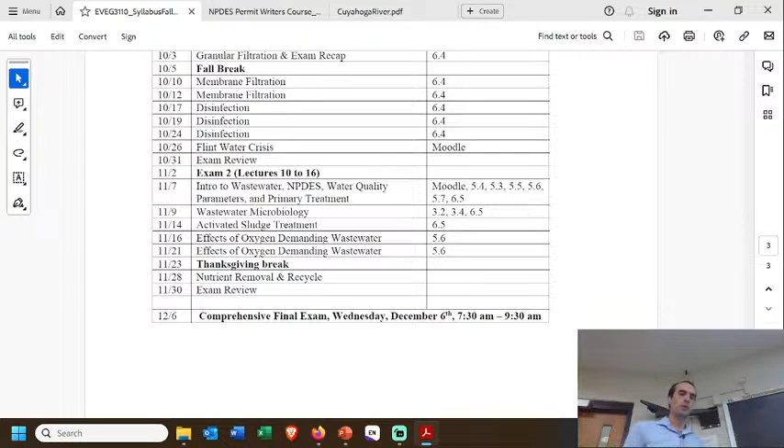And so here, what we're mostly going to focus on is the biological aspects of treatment, making use of microbes in order to do the removal of the waste that we want. We've covered disinfection, which we often do for our wastewater. We've covered sedimentation, which we use in our wastewater, as we'll see in a moment. And so now we're really going to narrow it to primarily these biological aspects. Okay, so that's just a glance at where we're at.

Speaking of disinfection, if you recall, we talked about the fecal-oral route of transmission. We also mentioned typhoid fever and its decline in the States, correlating with chlorination beginning, but it's also a matter of the other side of things, cleaning up our wastewater, right? So as we consider the timeline for rates of typhoid fever deaths, there's modern medicine, there's chlorination, and there's also better wastewater control. It'd be hard to say exactly what fraction is one or the other, but these are all going to the same place.

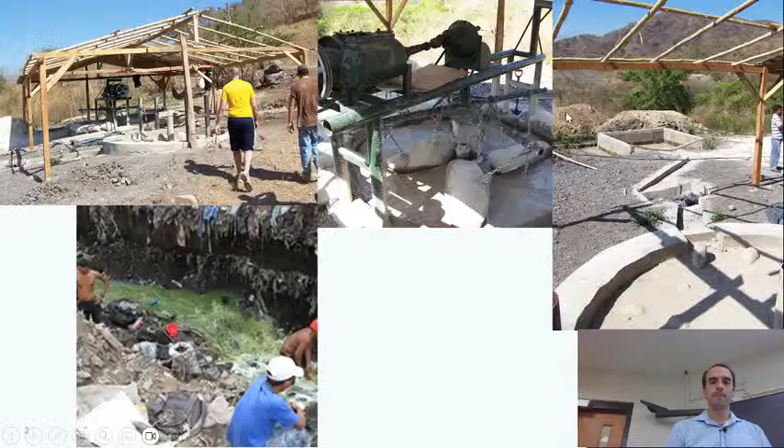So, as we think about wastewater, we might think about local pollution, and here's a few problematic wastewater discharges I've seen, from trips I took to Nicaragua. On the top, an open, unregulated gold mining operation, so they're milling ore in these containers with mercury. They're going to try to keep as much as they can, but a lot of mercury is lost straight to the discharge, emptied into the local creek or wherever it lands, from this makeshift stirring, grinding thing they've got.

And the discharge here has a little retention pond kind of thing, probably to help catch anything they wanted to keep, but it's not so good. Down here we see a discharge that looks super green, gross. It's actually probably mostly algae, but this is running straight through a landfill, and people are digging around for recyclables there.

It's a pretty unfortunate scenario when that just goes straight into a river. The deal is that it's green because there was a wastewater treatment of sorts upstream, using some kind of lagoon type of treatment. We'll talk a bit about those, and then it's just discharging straight through here. So probably not adequate treatment, and the fact that it's running through an active landfill is even worse, because then it's going to catch a whole bunch of other contaminants and send them out to the river.

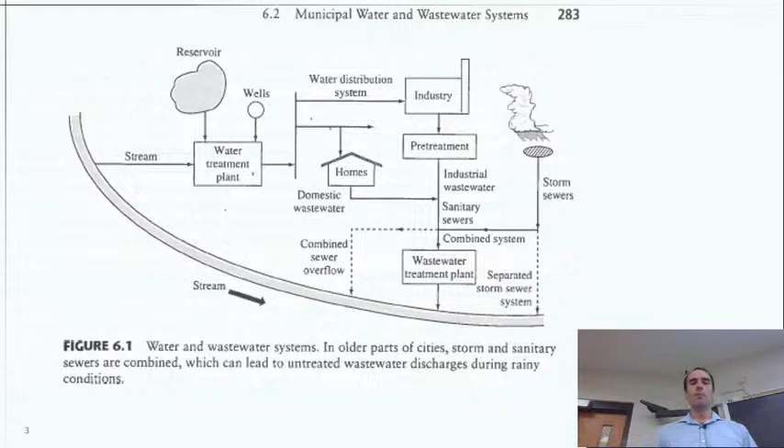So we've seen this image before. We've talked about our water treatment side, how do we make it drinkable? Now we want to consider, given worst case scenarios like that we might find, what do we do to prevent the worst case? What is the worst case? So what is the role of our wastewater treatment before discharging to the environment? Most of environmental engineering comes down to either protecting ourselves from the environment or protecting the environment from our activities, usually a combination of both. We want clean drinking water, and we don't want to kill all the fish in the river. We want both of those things, and fortunately they're not mutually exclusive.

Here we have a typical wastewater treatment design or plan that you might find. We'll have a collection system, that's our sewer system. In Baton Rouge, it's kind of interesting because it's so flat, we have to do a lot of pumping. In a lot of cases we'll design for gravity lines, so if you ever work in anything relating to wastewater, you might find gravity mains and force mains. The force main is where you're forcing the water through, it's pressurized in that sense because you're pumping it.

Theoretically, if we could, we'd always let gravity do the work for us, and so we would have our sewer plant at the lowest geographical area generally to allow gravity to collect things. Or maybe you'd have a pumping station, a force main, to bring it up to a certain spot and then allow gravity to take it from there. Here we generally have mostly just force mains because that's what we have to do.

Okay, so you'll collect your wastewater, then send it through some sort of a screen and grit chamber, something to collect the larger particles, larger stuff. Maybe somebody accidentally flushed a pen down the toilet or something, and where is that going to make it? Eventually it'll probably be removed in this spot if it makes it there.

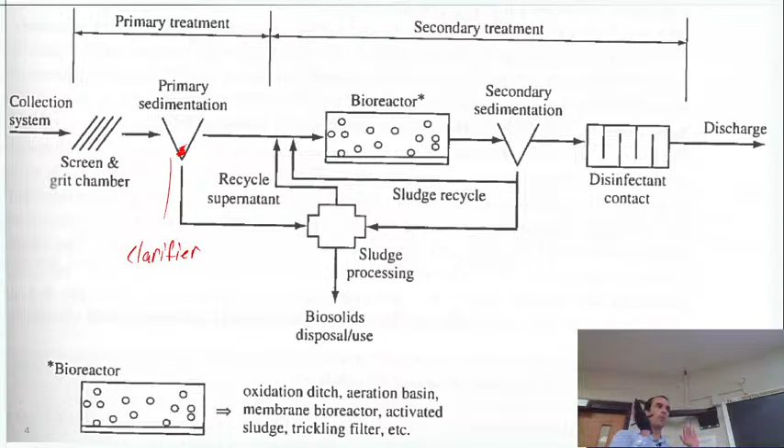So in drinking water, we usually refer to them as sedimentation basins. In wastewater, we often say clarifier. It doesn't have to be that case, but that's just generally how it is. So from here, if we do some basic physical removal and then basic physical gravity separation, we call that primary treatment. So if we are achieving primary treatment of wastewater, that's what we've done.

Basically we've used the most basic things we can. We're not filtering in like a membrane type sense, we're filtering in the sense of, hey, we've got this, just flow it through this rack of bars to prevent any big objects. That's not going to require any extra force really, it's just going to flow right by and catch a few things. It's just going to be a matter of cleaning up that grit chamber, the screen, the bar rack, whatever, and then gravity. Okay, from there, we send it into our bioreactor.

And so now we're talking about secondary treatment. We're using bacteria, sometimes algae, sometimes maybe some fungus or different things, but mostly bacteria growing, and we give them a whole bunch of air. So we're bubbling air through the water typically, if we're doing an aerobic process, and basically giving them the perfect environment to grow and eat stuff.

Because what they're going to do is take all the dissolved things. Maybe there's some sugar in the water, maybe there's some dissolved urea, for example. There's all sorts of organic materials that could be nutritious for an organism.

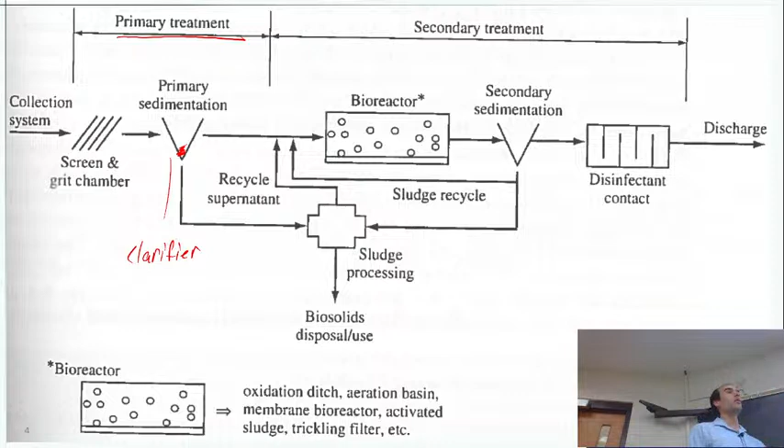And what we want them to do is take these dissolved components and transform them into solid components, because we have a much easier time catching a solid than catching an individual molecule. When we want to treat our wastewater, it's much more handy, much more convenient if we can transform it from that dissolved sugar molecule into a cell that could attach and clump up together and physically just drop out of solution. It all comes back to the simple diagram I showed at the very start: we have some process, we have some stuff, and we want to get it to just a little pile of stuff. We're going to use the bacteria to achieve that, and that way we can physically remove the bacterial cells by the end of this process.

Okay, so we go through a bioreactor. Conventionally or typically, we would call this a waste-activated sludge reactor, or this would be a waste-activated sludge process. We're calling it activated because we're activating it with bubbling air through it, or oxygen. Usually it's just air. It's making a sludge of bacteria. So we refer to it as sludge, or sometimes mixed liquor. We'll call it mixed liquor suspended solids sometimes.

And sometimes, in particular scenarios, we might want to do it without the oxygen and use different types of organisms that do anaerobic processes. It gets a little more advanced with the biochemistry stuff, but you can sequence back and forth if you want to get fancy. But in essence, a secondary treatment typically employs an aerated waste system, an aerated bioreactor at least.

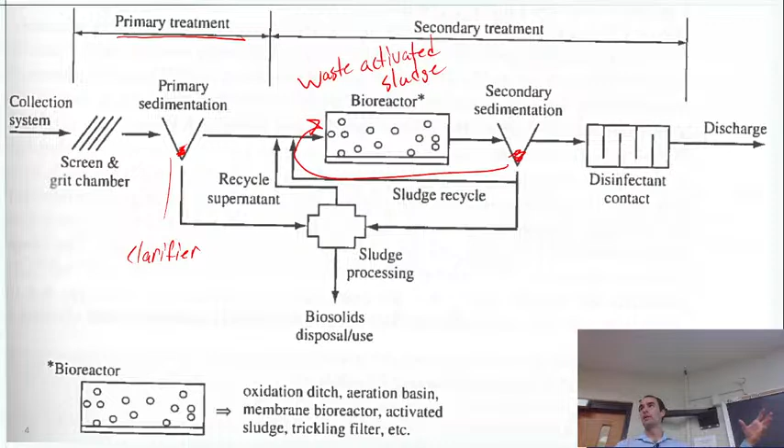From there, we'll find that we typically recycle some of that sludge straight back into our reactor to keep the same type of bacteria that are being very useful for us, to keep them growing and happy. Because if we had none of them return, then we'd have to start from scratch every time. So we like to keep a high concentration of these bacteria in there so that they are constantly consuming a bunch of waste. We'll cover more about that in a lecture or two.

Likewise, we send some of that to sludge processing. So it turns out that difference, how much we recycle or how much we send to waste there, it will end up being very important for us. So like I said, we'll come back to that.

We often have disinfection added there for our discharges, and that would constitute our secondary treatment. Maybe if we were doing some fancy nutrient removal stuff, if we had a phosphorus problem or a nitrogen problem, we might add a tertiary step. And this would typically be introduced actually before the disinfection. So we would kind of put in tertiary and just do disinfection last. Disinfection is kind of going to be last, and we generally just lump it in with secondary treatment.

Okay, so that's a typical wastewater operation. So what we're going to do today is talk about, well, what do we have to achieve with this wastewater treatment? What we're going to talk about next time is going to be, all right, how does this bioreactor thing work? And how do we get a handle on the important mass balances that are going to be involved with knowing how much waste can we remove and how does that relate to the bacteria that are there, because those are the things that we can manage.

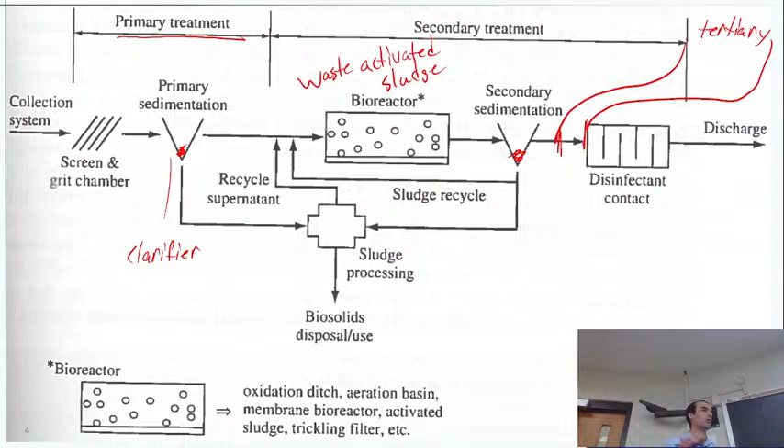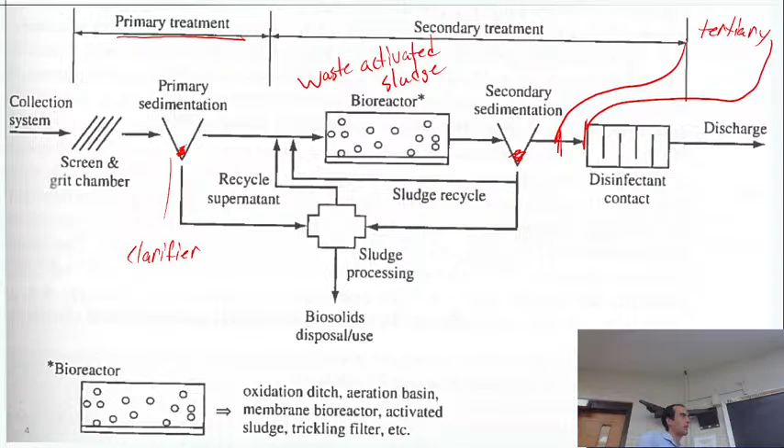Okay, so wastewater regulations. Oh, and by the way, including today, we'll probably cover this first initial step, the screen bar rack stuff. It's just a couple minutes to chat about what that looks like in practice. So we'll start that today, but that's pretty minor.

Okay, so regulations and standards. Well, typically what we're going to do is treat our water in such a way that whatever body of water is going to receive the wastewater is not going to be significantly harmed, right? We want to protect specific aspects of that receiving water. If we're discharging into the Mississippi, well, down here, the Mississippi's got a lot going on in it already, and so our wastewater may not impact it too much. But if you're discharging into a small stream that's very clean and clear, it's got a lot of wildlife in it, that could be a different story, right? And we want to protect that in order to maintain as close as we can kind of the natural state of what's going on there.

So the way we enforce that is a program called the National Pollutant Discharge Elimination System, NPDES.

I worked briefly for Michigan's NPDES program and received training on that, so I have some slides to share a little bit about it with you. That was in 2015. There have been a few updates, as there generally are, but nothing too major so far.

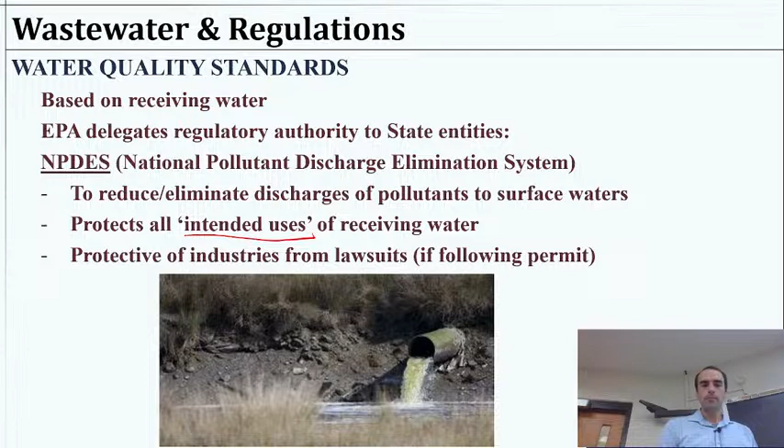Okay, so then we have conventional pollutants. These are the first ones that become pretty obvious. We call them conventional - this is usually what primary and secondary treatment is designed to handle first and foremost. So we have these conventionals and then we have some extras. The conventionals really are maybe the most obvious. If you discharge water that has a lot of what we call biological oxygen demand, then downstream the water becomes deprived of oxygen and the fish die, it stinks, everybody's unhappy, right? It's conventionally obvious, I guess.

So we'll talk about these few. First of all, this biological oxygen demand. This is something we'll spend more time on, but it's a measure of the type of substances that can feed microbes, basically. It's kind of like if you were to put sugar in water, bacteria could eat the sugar. That's an oxygen demanding substance because the bacteria are going to eat it, go through respiration, consume oxygen, and emit CO2. So it's the amount of oxygen demanded by microbes for this respiration when they eat organic matter.

So this is a loose way to quantify the organic matter, but in the units of oxygen consumed. That way we can know something about how much oxygen is being used. That way, if we have a wastewater discharge into a stream, we can know whether or not that stream will become oxygen depleted, because we know our fish and wildlife need oxygen in the water, and if we drop it too far, there are problems. So this is kind of the scheme of BOD, biological oxygen demand.

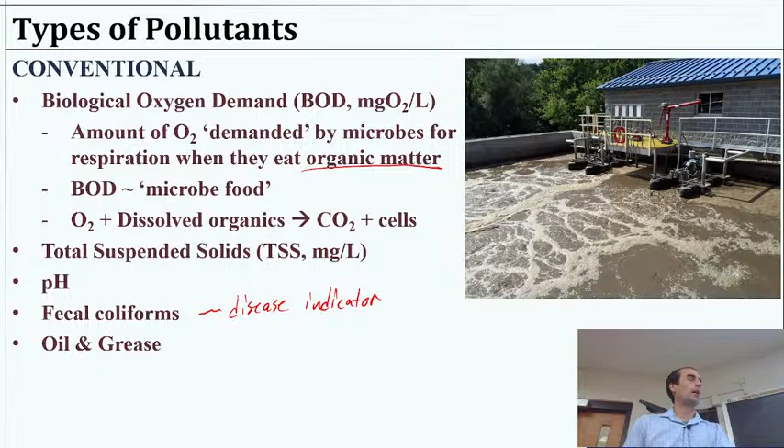Okay, last one is oil and grease, and that might sound a little obvious, but if you discharge a bunch of oil and grease in some industrial process, you're going to get a layer of oil and grease on the surface of the water, and that might not look too nice. It might cause some ecological disruptions, but it could also set your lake on fire if you're not careful. So one of the reasons that's in there is that this is something that has actually happened.

We've actually seen several cases in the 50s and 60s, and maybe into the 70s, where there were just unregulated discharges of oil and grease from different industries. Eventually you get an oil slick, and if you have an ignition source, you get a big old grease fire. Do you guys know how to put out a grease fire?

Okay, so if you've got it in a pan, take it away from the heat and put a lid on it. Good stuff. What else? Not water. Right, not water—why not? Because it'll just make it expand. I don't know the chemistry, but I know it makes it worse. Yeah, it makes it worse.

If it's in a pot and you pour water on it, the grease normally floats, so the water sinks, and then it boils because it's really hot. What happens when you boil water? Steam—it expands. What happens if you do that while it's covered? It kind of explodes, right? So really quickly, the water you just poured on it suddenly explodes, throwing burning grease everywhere. I saw a video recently of a firefighter demonstrating this, all suited up with a pot of boiling, burning grease. He just takes a little can with a stick, dumps in the water, and it goes everywhere—flames, a big fireball.

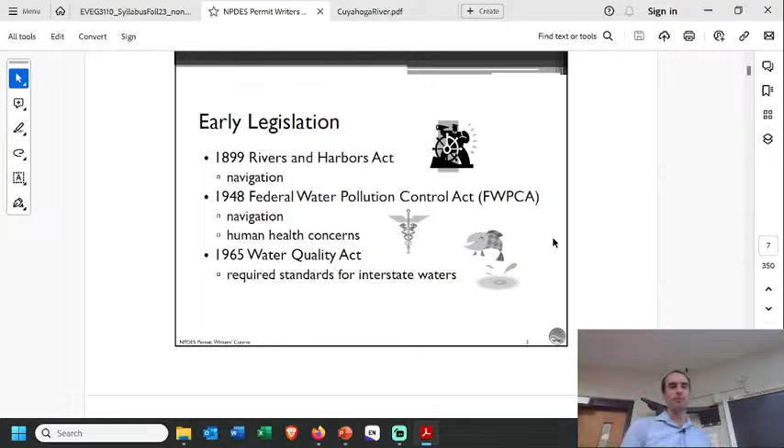So, in 2015, I had a chance to go to a super exciting workshop. I'm saying that with some sarcasm here. It was a nice workshop. It was about a week-long course. You go into kind of an office building, and this was in Chicago. It's neat to go to Chicago. But basically, it's kind of like 8 hours of lecture a day, but the lecture was sort of like, all right, let's look at this number, and in the Cuyahoga River, here's what happened. Just very monotonous, and you kind of had to try not to fall asleep. So it was interesting. Hopefully I can make it a little more interesting. So I posted this in case you wanted to see kind of the bigger scope. It wasn't that bad. I like to joke about it.

So we've already talked a bit about it, so I'm just going to skim through this first chapter of it for a couple minutes, point out a few highlights. We'll take a look at a table of the toxic compounds that we know about. And whatever I forgot to mention, hopefully I can add it in here with you. That's what I plan to do here. So, okay, early on, the first semblance of some sort of wastewater discharge control actually came from navigation.

So keeping navigable waters navigable was kind of the first effort towards keeping some control of wastewater. That was the Rivers and Harbors Act. So I don't know, you can't send too many dead trees down the river or something. It had to do with that.

Later that became 1948, the Federal Water Pollution Control Act. That's when we started saying, okay, we have some human health concerns here. This is probably not good for us. Let's start acting on that. 1965 was the Water Quality Act. Okay, maybe we've had one too many lakes on fire. And so that started requiring standards for interstate waters. And a lot of the federal guidance is kind of from an interstate waters type of a situation.

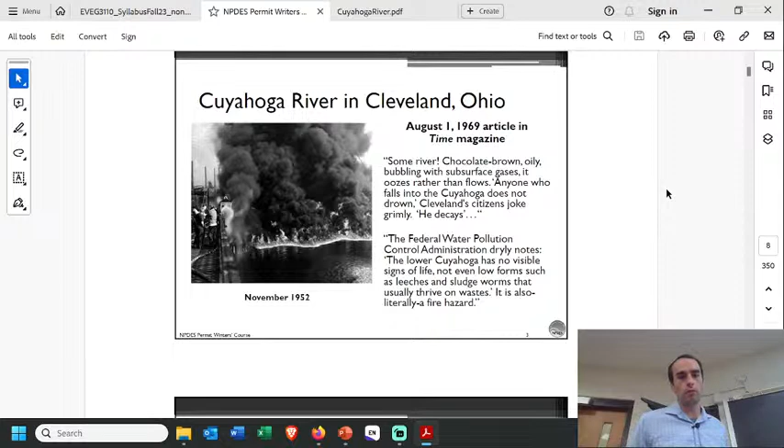Okay, so from that article, this is the Cuyahoga River in Cleveland, Ohio, August 1st, 1969. I'm just going to read this clip. Some river, chocolate brown, oily, bubbling with subsurface gases, it oozes rather than flows. Anyone that falls into the Cuyahoga River does not drown, Cleveland citizens joke grimly. He decays. The Federal Water Pollution Control Administration dryly notes, the lower Cuyahoga has no visible signs of life, not even low forms such as leeches and sludge worms that usually thrive on wastes. It is also literally a fire hazard.

So that was the state of things. That photo is from 1952. This article was 1969. So that fire was early in the 50s, and it was still known as a fire hazard by 1969. So 1970s, when we really started getting some progress towards our current regulations. This was kind of the first draft Refuse Act permit program. It was struck down because it wasn't constitutional. It was perhaps a good direction, but poor implementation sort of situation.

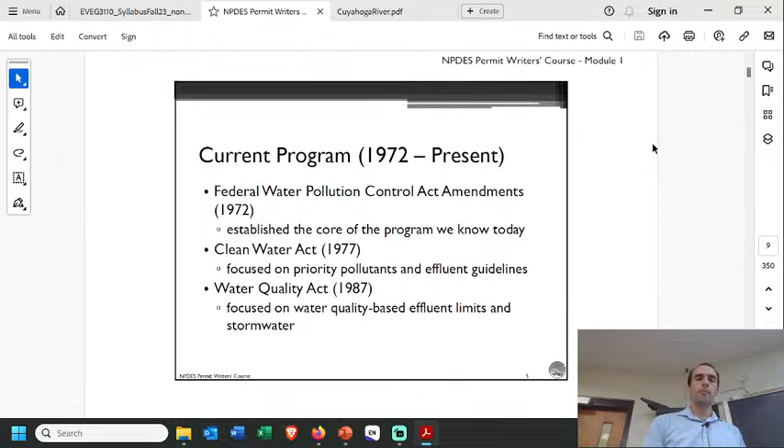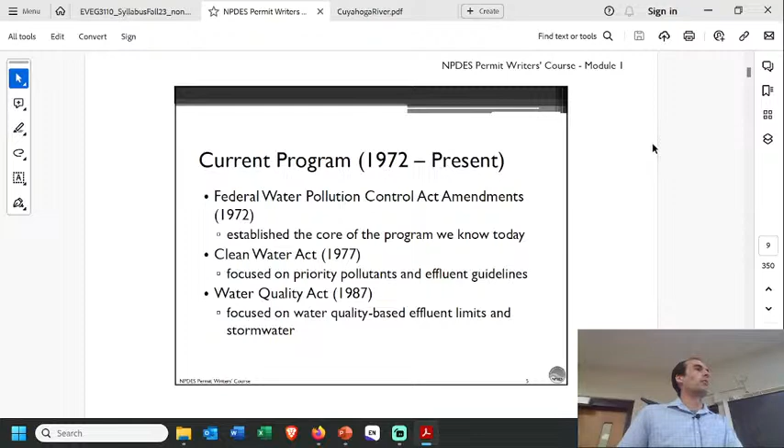Which, by the way, present day, if you look at how legal things, political stuff happens, you'll probably find that actually happens a lot more than you realize. It's easy to see looking backwards, but maybe there was an important issue, people made a big deal out of it, maybe they were trying to get elected or who knows what from it. Hopefully there's some balancing that happens, and eventually we have something that is actually good and balanced, right? But it may take some time.

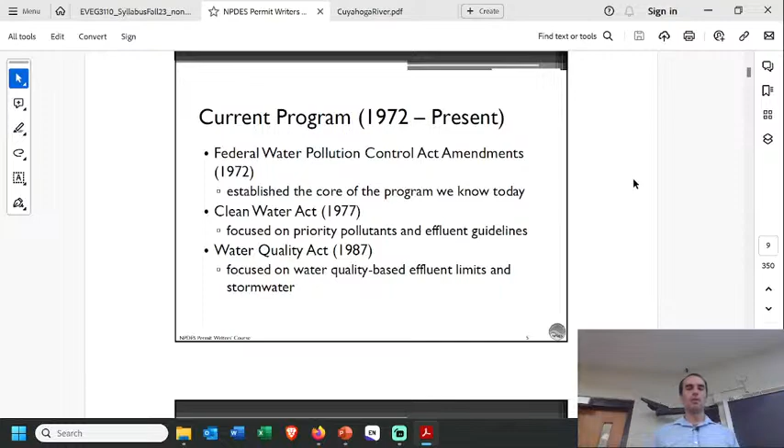So, current program, we have the Federal Water Pollution Control Act amendments, 1972. That kind of laid the groundwork for the Clean Water Act in 1977 and the Water Quality Act in 1987. Let's see. So here's where we see that the initial intention was to eliminate the discharge of pollutants to navigable waters by 1985. Just eliminate them. None of those pollutant things, right? That was their goal. But maybe if we can't, then at least by 1983, wherever attainable, a level of water quality that provides for the protection and propagation of fish, shellfish, and wildlife, and provides for recreation in and on the water.

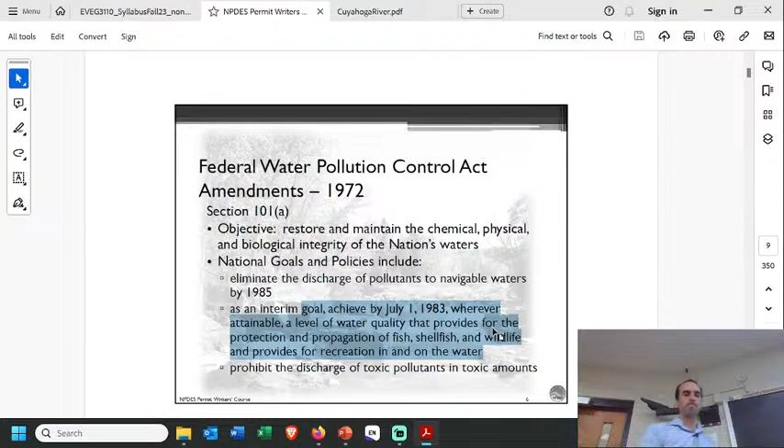So that turns out to be the more reasonable aim, right? And we still don't meet that in every single scenario according to how we measure it. Some natural bodies of water don't meet that just by nature. Some scenarios just don't support life very well. And then it also says prohibit the discharge of toxic pollutants in toxic amounts. That one's a little easier, right? We can identify, hey, that's toxic, let's not discharge that. When it comes to temperature, maybe there's some wiggle room where, instead of eliminating it altogether, we'll get, wherever attainable, a level of water quality that provides for these intended uses. So that's kind of how it morphed. That's the direction it went.

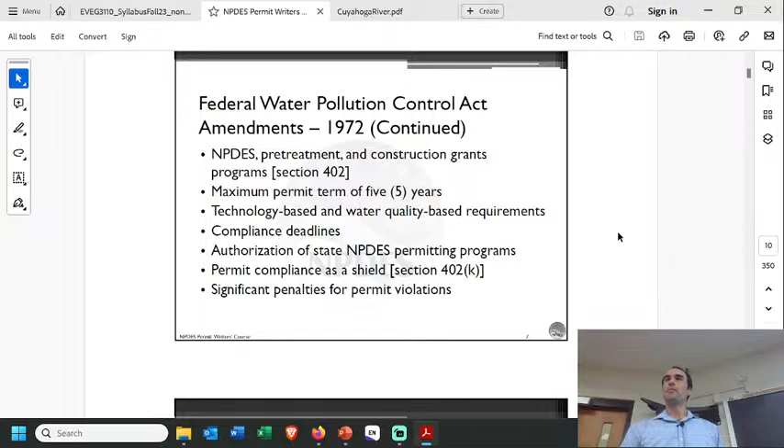Basically, the NPDES program, so it was the EPA, but then they authorized different states. Almost all the states have their own NPDES program now. And the permits actually require some fee. So when I was in Michigan, I learned that the Detroit Water and Sewerage Department, their wastewater discharge, which is absolutely enormous, for them to get a permit, they pay something like $300,000 a year for that permit to discharge the water. It might actually be a lot more than that. But it's a sizable amount, and it actually pays for this permitting program. So people want to discharge waste, so they pay a fee, and the large discharges require a large permit, and that actually pays for that regulatory system to be in place. Works out reasonably well.

Okay, 1976, here's where a bunch of toxic priority pollutants were described. There were 65 categories, 129 pollutants, and this is also something that would be updated every 5 years, I think. In addition to that, they identified certain industries that tend to produce certain pollutants. So if you have a textile industry that's going to be dyeing clothes certain colors, chances are good they're going to have dye molecules as a pollutant. And if some of those are toxic, they can identify, oh, hey, here's this class of pollutants. We expect these particular molecules to be a problem.

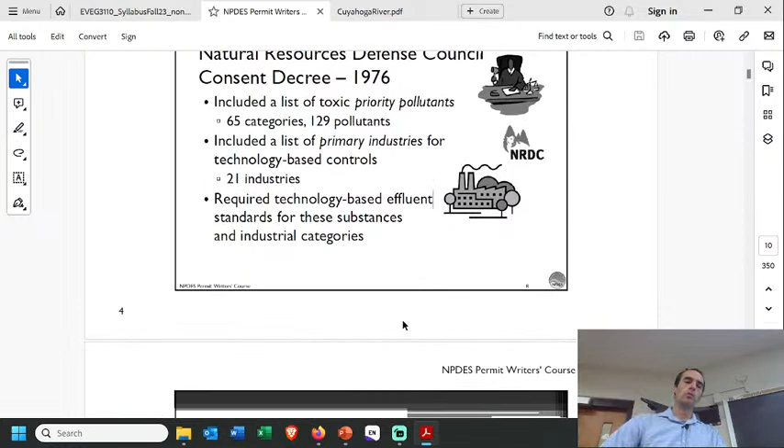Therefore, in some cases, they would say, all right, if you're this type of industry, we'll give you a technology-based effluent limitation. So that means you must use this type of wastewater treatment. Maybe it's activated carbon to do adsorption. We haven't really talked about that much, but that can catch chemical pollutants pretty well. Maybe it's some other kind, but it'll say this technology is sufficient, so you have to use it in this manner in order to discharge this type of waste. That way it simplifies things, not having to check for the pollutants all the time, all day, every day.

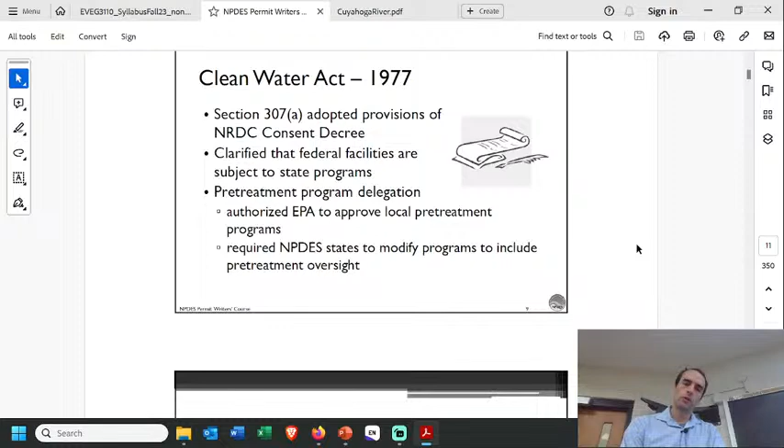Okay, let's see. Talked a little bit about that. 1987 is when stormwater permitting was added. For example, if you have an oil changing business, you do a bunch of oil changes every day, chances are you're going to have some grease that gets on the ground. If you're not careful, then it rains, all that oil and grease that was spilled is going to come off the ground and get into the water. So there's maybe some basic prevention, have a little oil and grease trap within your intentional drainage. Maybe that's all it needs, right?

It's pretty simple, straightforward. Those types of permits, I did a lot of them. It was kind of like shoveling paperwork along. It was like, okay, make sure the info's up to date. This will be good for them for the next 5 years. They just have to affirm that, yeah, here's our permit. We paid for it. We're good. So some of those can be pretty simple.

Actually, there's an interesting scenario right now. If you've been following SpaceX, they're trying to launch the really large rocket, and they have this very big water deluge system now to catch all that energy and protect their launch pad, spraying a whole bunch of water right underneath where the rocket is firing. They've had a stormwater discharge permit for the facility for whatever runoff might happen. But now there's some question about whether they need more than a stormwater permit, given that they're using this deluge system that's probably hundreds of thousands of gallons in a few seconds.

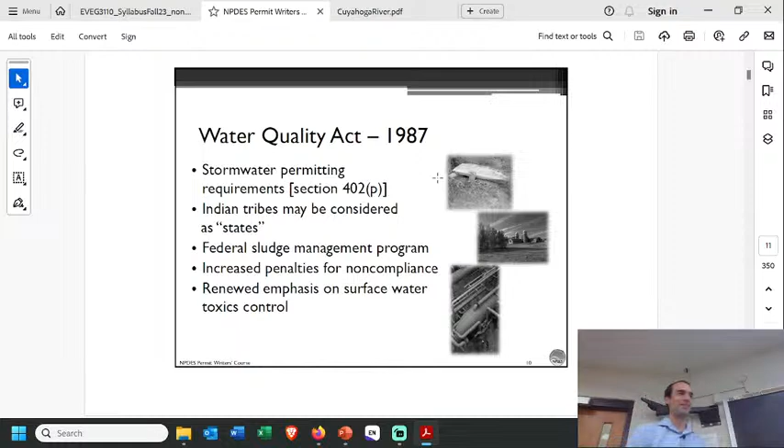And I'm intrigued to see where that goes, because maybe that does constitute a discharge beyond what stormwater entails. But I know they're frustrated because they've been ready to launch a rocket, waiting on all these regulations and stuff. So that'll be interesting to see how that works. Okay.

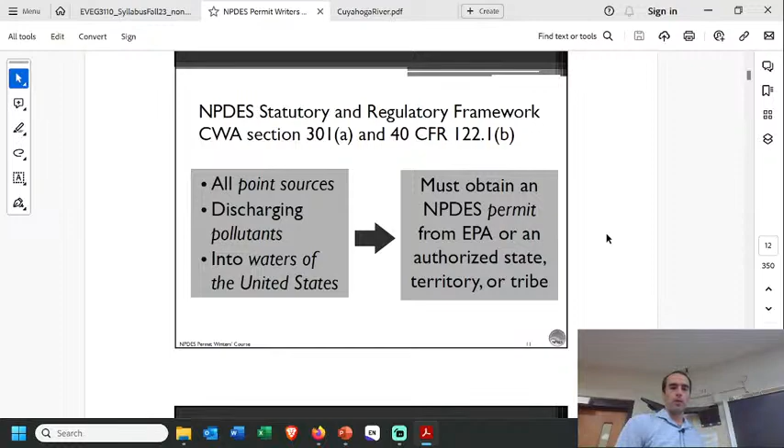We talked a bit about what a permit is. It's like a license. Generally, it's referring to point source discharges for the most part, some sort of a pipe or a ditch. One thing that has been an exception, and there have been a few updates on this actually since this document, is agricultural runoff. We're trying to grow food. We have to fertilize it, so we're adding pollutants, nitrogen and phosphorus. And then if it rains or if we're watering, we have runoff of polluted water. That's something that, on some level, we have to be okay with because we want food, right?

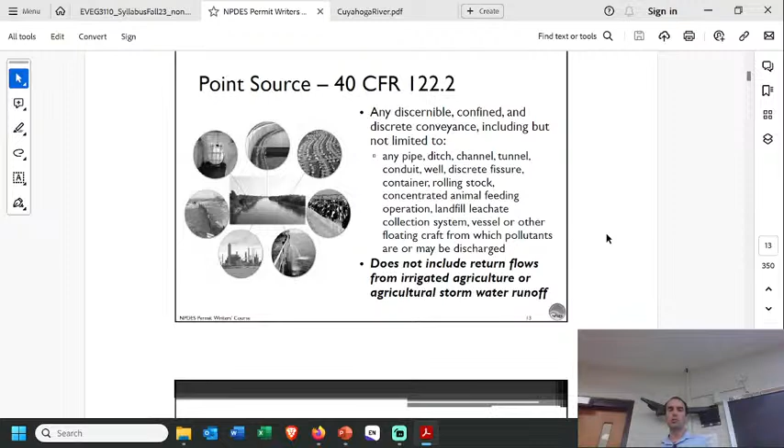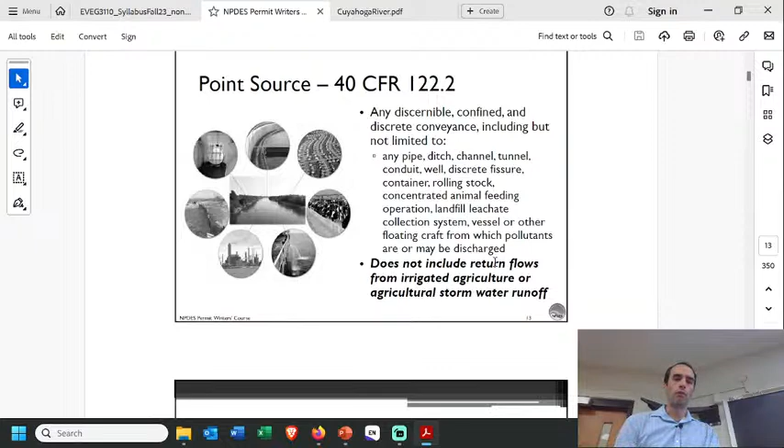On another level, perhaps there are best practices, perhaps there are ways to work with that, but at minimum, we would not generally consider an irrigation ditch itself to be a water of the United States that we need to protect for that water's intended uses. So there's some back and forth going on lately about that. Okay.

So speaking of waters of the United States, that's typically how we define what we regulate. It's all interstate waters, all waters that are currently used, were used in the past, or may be susceptible to use in interstate or foreign commerce, including waters subject to ebb and flow of the tide. All other waters that could affect interstate or foreign commerce, all impoundments of water in the United States, tributaries of the above four categories, the territorial sea, and wetlands adjacent to waters identified above.

Okay, so there's a bit of controversy now, or recently, about the wetlands adjacent to waters. Originally this is all coming from the navigation stuff, so you see it tying back into there. There are some issues where it's important ecologically to protect wetlands in general, and wetlands do have impacts on the ecology of a river or some other larger body of water. It's actually not like a discrete thing, here's the shore, here's the water, and here's the wetland—that's actually much more merged. So there's good reason to try to protect the wetlands and prevent discharge of significant waste.

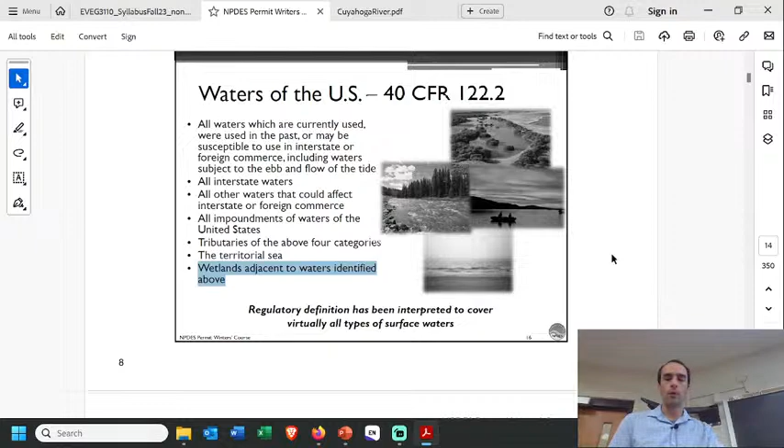But at the same time, there's definitely room for arbitrary judgments and penalizing people for who knows what reason, because you could maybe make a case that that's a wetland, and so therefore you have to act differently. So I'm aware that there's some issues there. If you're discharging enough water, you might end up turning the wetlands into a stream, so at some point you might run into that also. I think the fact that we have to permit that level of discharge anyway might make the protection of the wetlands themselves under the NPDES program not matter too much. I don't know, there's certainly some cases that have issues there.

All right, groundwater is a different system. You can sometimes discharge to the ground, pump water down into the ground like we pump water out sometimes. That has its own permitting program. It's not quite as common, and I'm not as familiar with it, but it kind of follows the same overall shape or approach to our surface discharges—we want to protect whatever we might want to use the groundwater for, and make sure it's not going to contaminate our drinking water aquifers and things like that.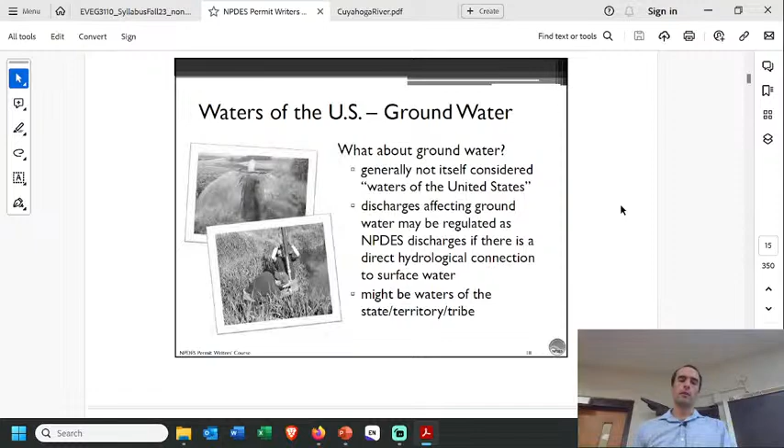Okay, so an article from June 20th, 2009 about the Cuyahoga River revisited, showing some progress since 1969 and all those regulations. The first time Gene Roberts fell into the Cuyahoga River in 1963, he worried he might die. Mr. Roberts smelled so bad his friends ran to stay upwind of him. Recently he returned to the river carrying his fly fishing rod, and in 20 minutes he caught 6 smallmouth bass. 'It's a miracle,' he said. 'The river has come back to life.' Today the Cuyahoga is home to more than 60 species of fish, said Jim White, executive director of the Cuyahoga River organization. Beavers, blue herons, and bald eagles nest along the river's banks.

Smallmouth bass, by the way, are pretty particular about having good quality water—they like a fair amount of oxygen. They don't really like hanging out down here in Louisiana because it's generally warm and there's less oxygen in the water bodies, so unless maybe there's some in certain rivers, you generally won't find them too often. The reason he would have smelled so bad is because the river would have gone anoxic, oxygen deprived. The oil and grease on top would probably also prevent oxygen transfer with the air, so it would have smelled like rotten eggs if you broke the surface—pretty nasty. That's probably what was going on there.

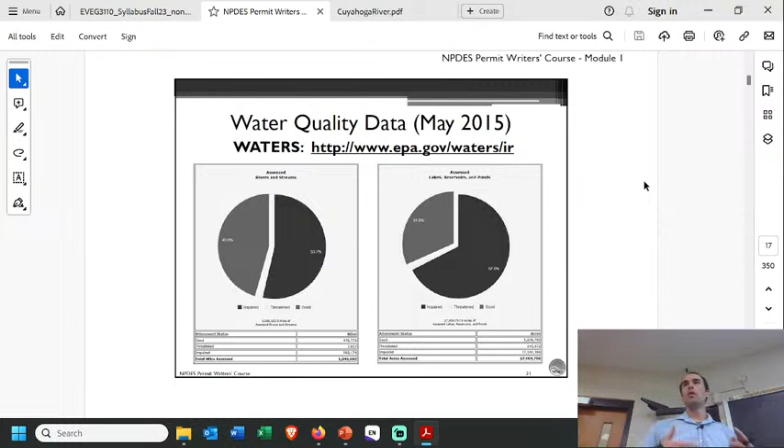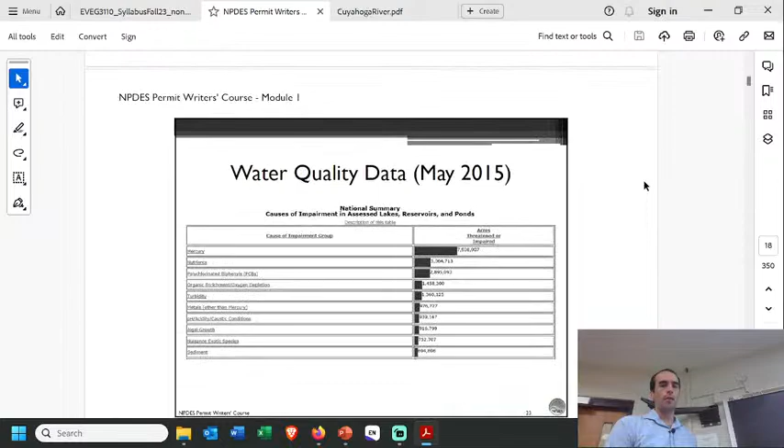All right, so there are some assessments of how many bodies of water are considered impaired for their intended uses. There's a lot that goes on there, a lot of ways to measure—you can look at rivers, you can look at lakes, how they're impaired, why they're impaired, and stuff like that.

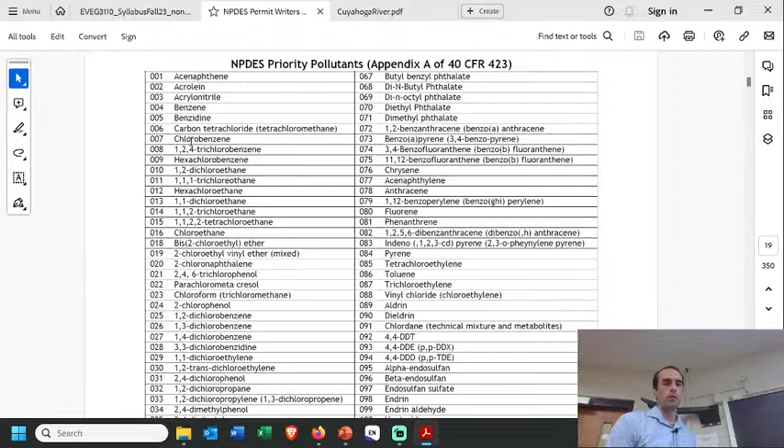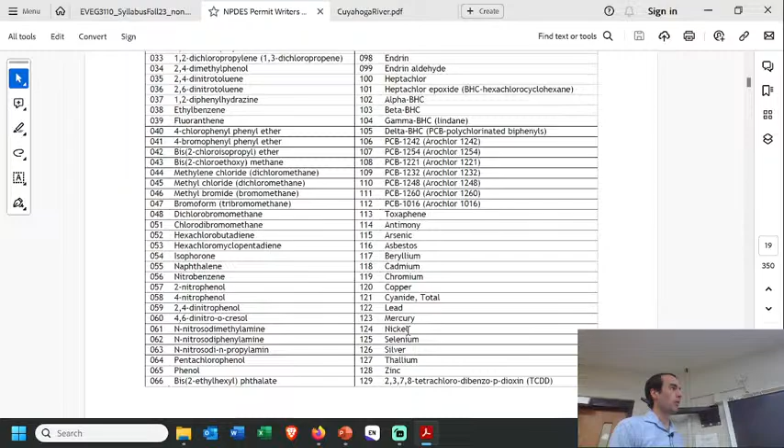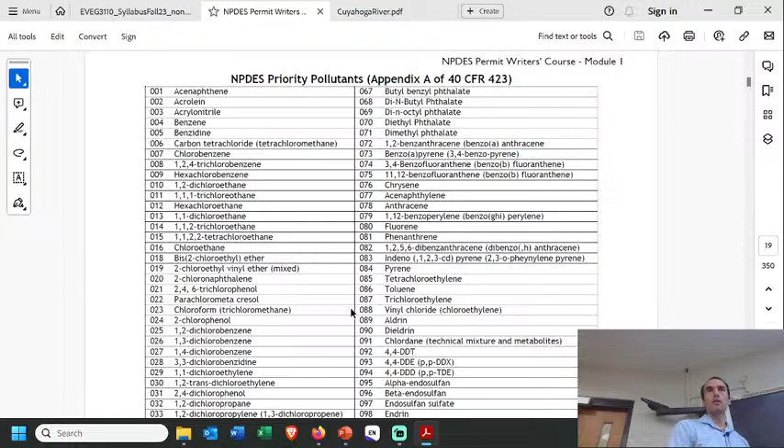Here's the list of priority pollutants—you'll see things like benzene, carbon tetrachloride, chlorobenzene, all sorts of known toxic pollutants classified here. We're up to 129. These also include toxic heavy metals like lead, mercury, nickel, selenium, etc. So this list is kind of the toxics and heavy metals table. If we find more, they'll be added, in terms of common industrial pollutants.

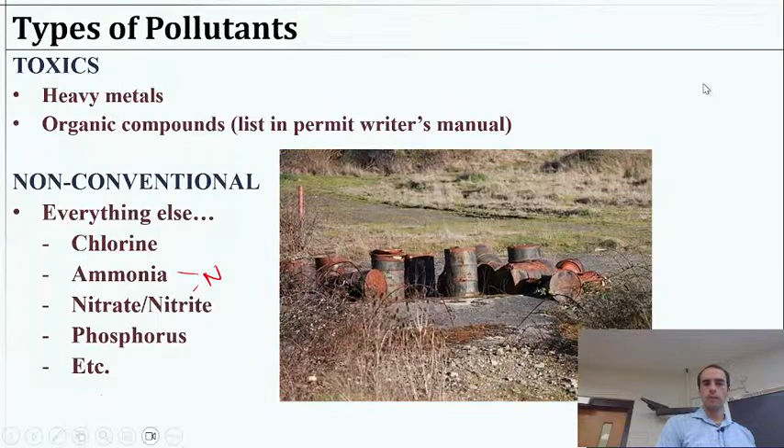Okay, so I wanted to talk briefly about primary treatment. Primary treatment is that first sedimentation, but also grit removal, screens, basically management of your wastewater collection system, which would include your sewer system.

The first thing I want to say is, if you ever see flushable wipes, they're not actually flushable. Don't flush them. I have a little video on that, so let me see if I can get the sound to play, because it's entertaining to highlight that point. Let me see if I can get the sound to work.

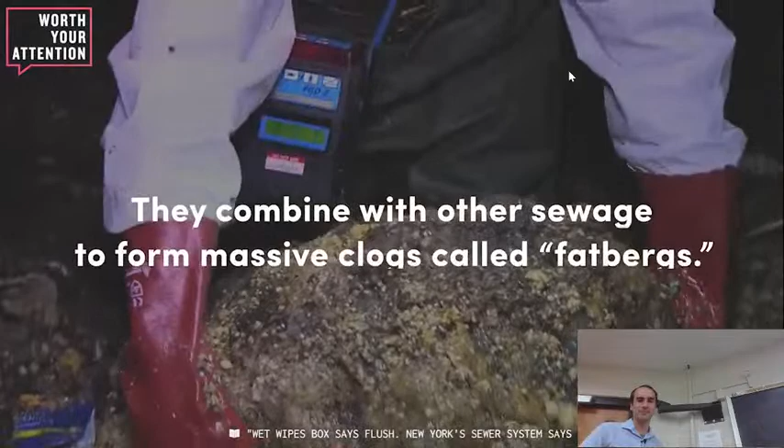So-called flushable wipes getting stuck in the sewer systems. I have never seen one dissolve. They have to remove them on a daily basis.

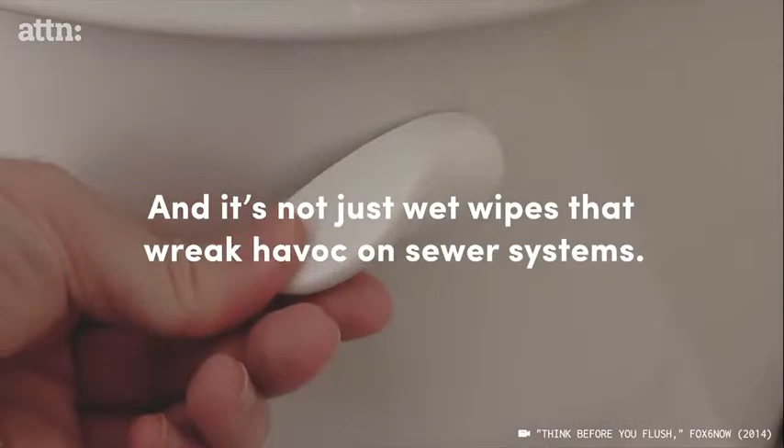Look at that. So that's why we have grit removal and screens and bar racks and stuff, because that's pretty nasty, right? And that probably doesn't make it to the wastewater treatment plant. It just sits there, and somebody's eventually going to have to clean that out. So fortunately, there are some high-paying jobs out there, because no one else wants to do it. All right, so that's what I have to say about flushable wipes.

Don't. I always kind of laughed that the guy's like, I never seen one dissolve, and for a while I was like, well, would you see it if it dissolved? But I guess maybe you could see half of it dissolve if it was hanging out of the water or something. I don't know.

I think the claim for flushable wipes is that they're going to make it through your plumbing, so then you don't have to think about it. Like, it'll flush, I promise. Maybe it flushes, but does that mean you should? Our toilet paper is designed so it does dissolve, right? You know that if you accidentally get it wet when you didn't want to, it starts, you can tell it's not going to last very long. So it's got to go somewhere.

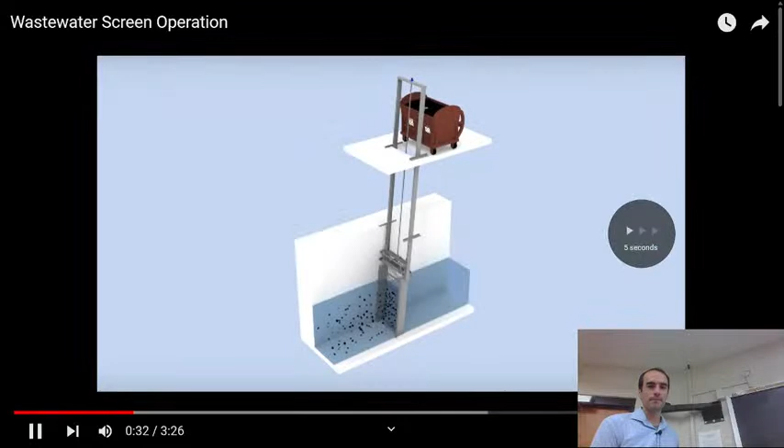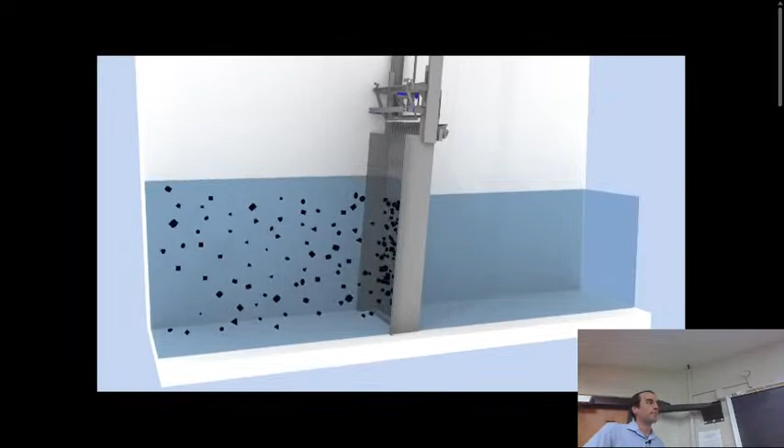So they basically have this system where water's flowing through. You'll be collecting these non-flushable wipes, etc. And then it has kind of an automated system to scrape it, to do a continuous operation that can remove this trash and debris over time, and it does a decent job automating it.

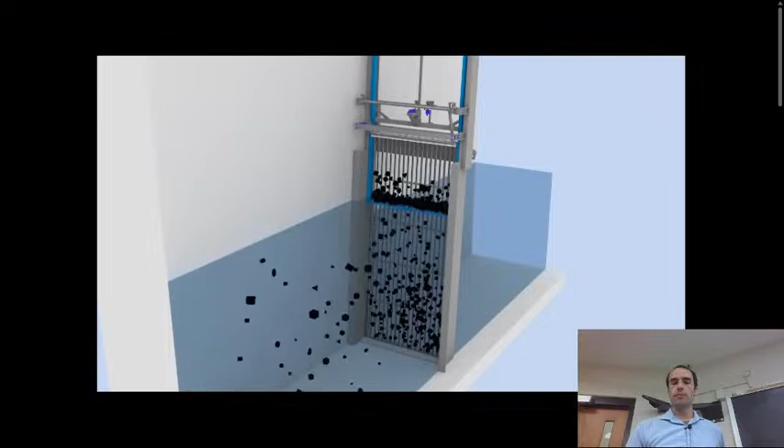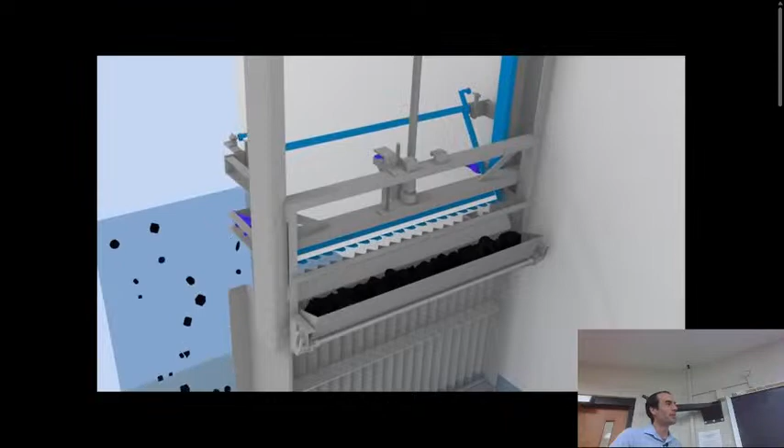I mentioned already visiting the Detroit water treatment plant. They had a room full of things that looked a lot like these. It was a pretty nasty room, with garbage and junk everywhere. All of those items that they mentioned not to flush, you could see them around. It's pretty dirty business, but at least there's a fair bit of automation involved.

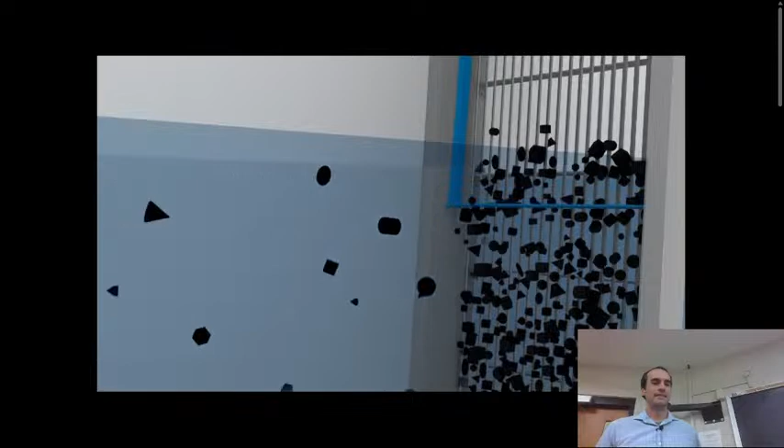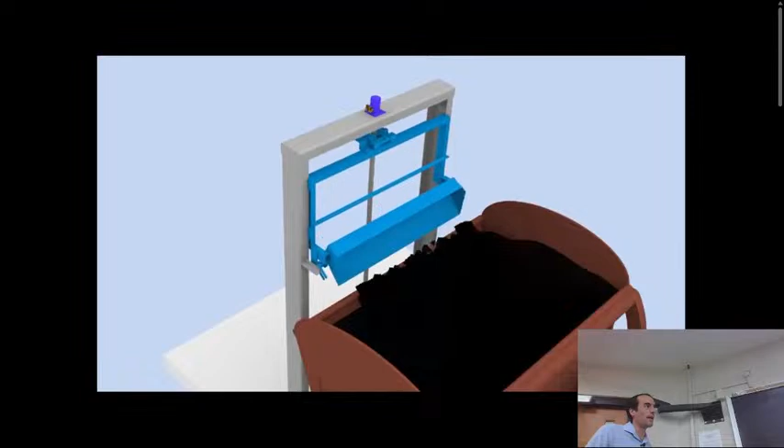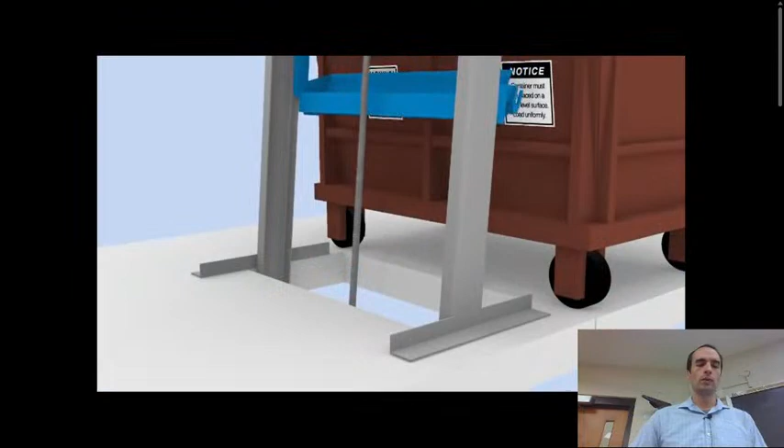So each one of these would have a dumpster right next to it so that it would dump into them. Some are perhaps more advanced than others, but ultimately you're finding some way to collect the stuff and eventually dump it in a dumpster or something. I'm sure you can get high tech with them, and maybe this is kind of high tech, but it's sort of a low tech problem. There's stuff in the water that you don't want to go through into the other plumbing, so you don't want it to get past this spot, so you have some sort of screen bar rack type of situation.

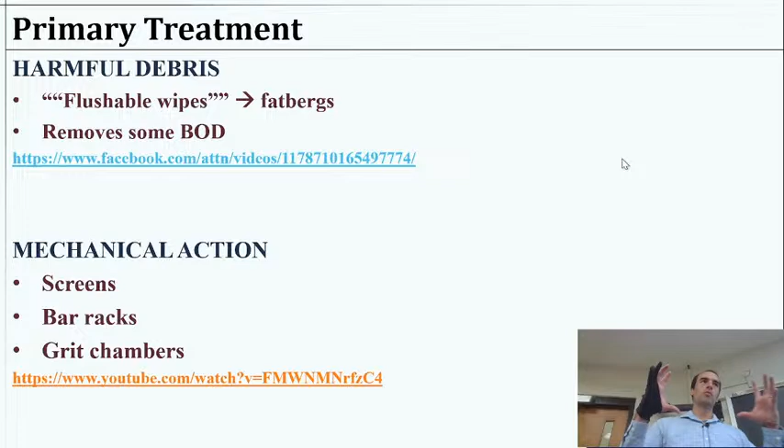Grit chambers are kind of similar. They're usually like a barrel that has a bunch of small holes in it, so it could catch little pebbles, but water could flow through this barrel, and it would be turning or something, getting the pebbles removed from the water, and the water just goes through. I've seen some grit chambers like that. Basically, this is all protective of the rest of the plumbing in the system and the wastewater treatment.